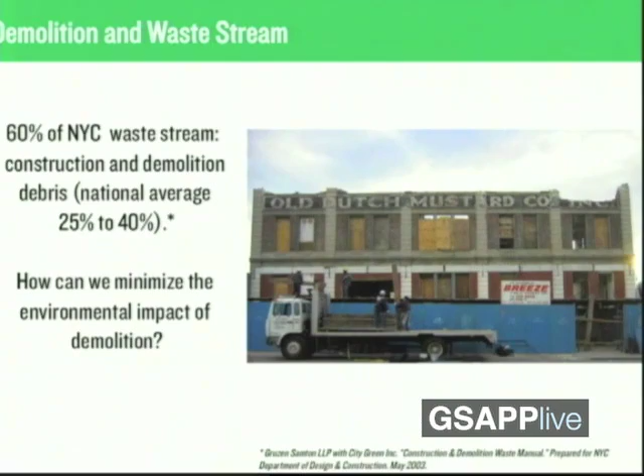Windows are always an important issue to preservationists. We need to develop metrics about retaining buildings versus new ones, and demolition. We're not going to talk a lot about demolition today, but this is something MAS is going to be working on. 60% of New York City's waste stream is construction and demolition debris, and we need to figure out ways to reduce that environmental impact, especially because we don't have a landfill in New York. We truck, and sometimes barge, all of our waste to distant states, so there's an enormous environmental impact.

We look at how we can achieve higher population density while preserving our relatively low-density historic districts.

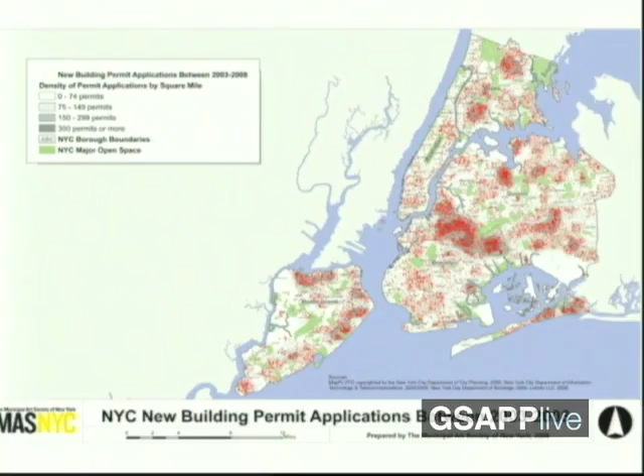Again, looking at change, we mapped new building permits during the boom, 2003 to 2008, and found there was about a 300 million square foot increase to the city during that time. So while there was a lot of demolition, the good news is that we actually did increase density, which is good—it's a greener city to have higher density.

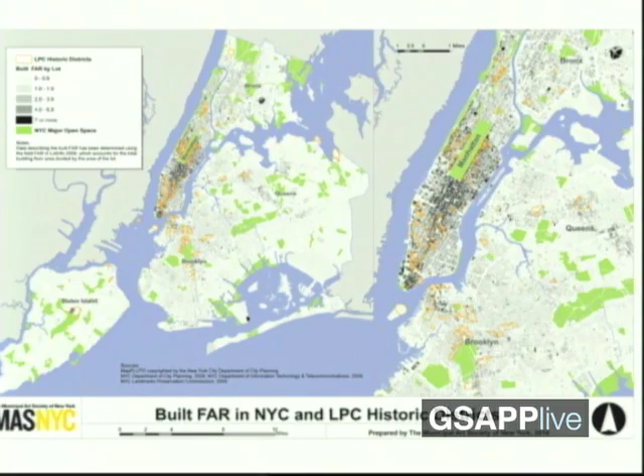Another issue preservation is going to have to start making arguments about is density in the city. In terms of built density, the floor area ratio, the darker colors are denser, bigger buildings, and the lighter colors are lower. But if you look at population density, it doesn't always correlate with bigger buildings having more population—Brooklyn has a relatively low building stock but high population density. So MAS is going to continue to do analysis on these kinds of density issues.

So the next steps: MAS is going to be writing a white paper, carefully listening today during the conference to help inform it, also drawing from the roundtables on these issues. We're also very proud that we just received a grant from the J.M. Kaplan Fund to do an actual demonstration project on a small landmark building. We're going to try to find a nonprofit owner of a building less than 50,000 square feet, and we're going to do the retrofit and share all the findings so we can start to build the case studies. With that, I'll conclude, and I'll ask Frank Sanchez to come up to introduce our keynote speaker.

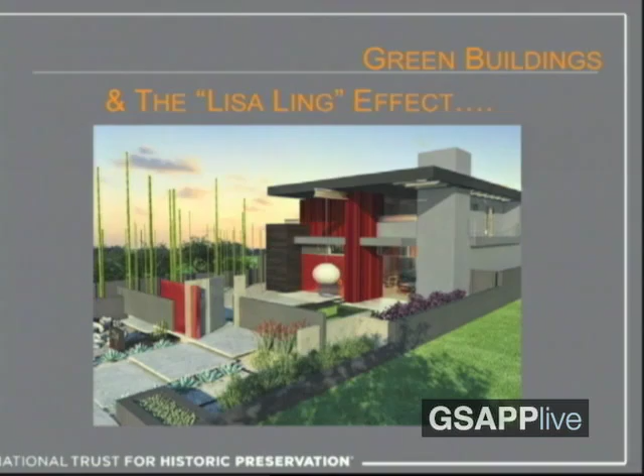And Lisa Ling isn't alone. I'm just going to throw these statistics up. In New York, Lisa showed you that 77% of buildings are responsible, the operation of buildings are responsible for greenhouse gas emissions. Nationally, it's about 40%.

But people tend to think about how do we solve the greenhouse gas problem through improving the operation of buildings, by building new buildings that are green and energy efficient.

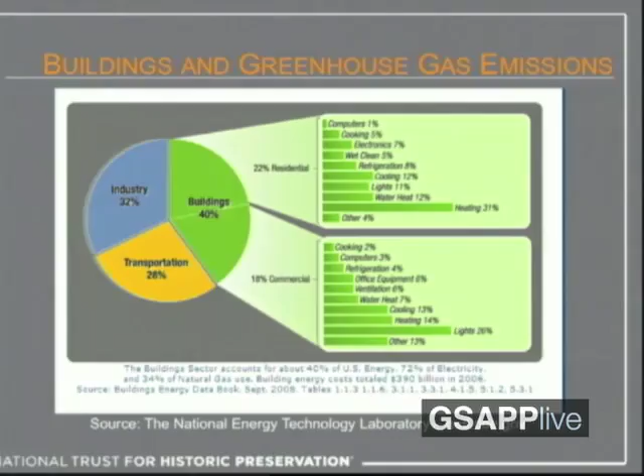Another statistic that I thought was interesting: the Environmental Protection Agency recently released a study that looks at GHGs in a very different way, not just by sector - industry, transportation, commercial - but instead looks at the greenhouse gas emissions associated with the manufacturing of material goods in the United States. It shows that 42% of greenhouse gas emissions come from the production of things, of stuff that we use and buy.

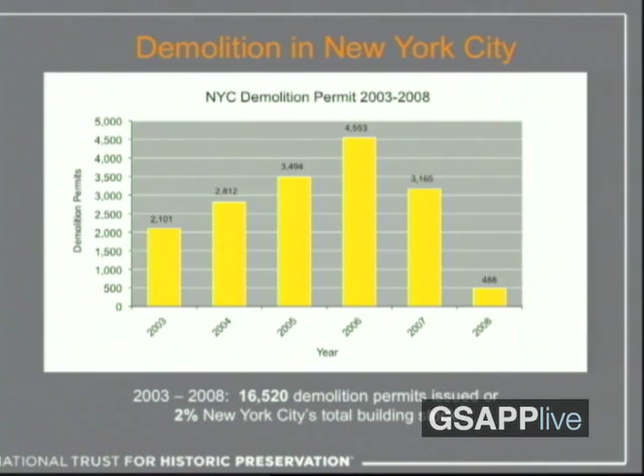Lisa showed you this statistic. I think it's interesting that building demolition trends are up. In the last couple of years they've been down because of the economic recession, but this is going to end at some point in time, and we're going to be right back.

So what has the National Trust done about this? Our sustainability program is focused on encouraging four things to happen, and I'm going to give you a little bit about each one of them. First of all, reuse or recycle entire buildings.

Deconstruction is great, but we don't think it's part of the solution, or not entirely. And I just gave you the reasons why - it's basically because when you recycle or reuse a building, you avoid the environmental impact of new construction that I just talked about. We encourage reinvestment in older communities.

These communities are as sustainable as it gets. They embody all the new smart growth and new urbanist principles. What we're seeing around the country - this is a community somewhere in either Kentucky or Missouri, I'm not sure which. I did a little road trip about a year ago, and this typifies dozens and dozens of communities that we saw in that part of the world, and there are thousands of them in the United States.

All the investment has gone two miles down the road to the interstate interchange. It's sucked the life out of this town. This is a Saturday morning, and this town is virtually a ghost town. What do we need to do to bring reinvestment back into these communities? The preservation community is not out ahead of this issue. We have some tools, but I don't think the tools are good enough.

Lisa talked about retrofitting green. We know not all old buildings are energy efficient, so we need to improve the efficiency of these buildings.

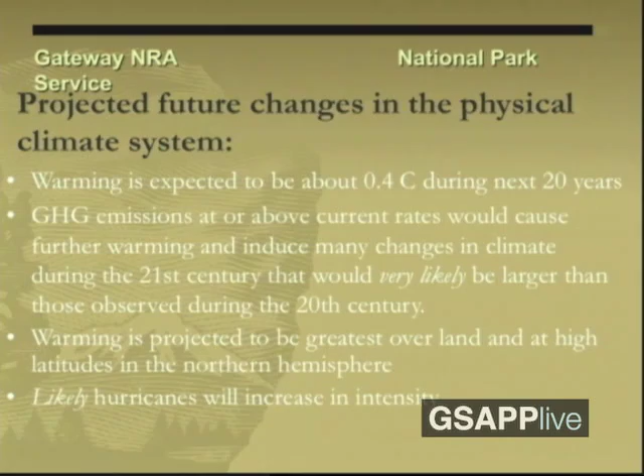Greenhouse gas emissions at the current rate would cause further warming and induce changes in climate during the 21st century, and this is very likely based on the IPCC data. Of course, the warming is projected to be greatest over land at the higher latitudes where we are, and higher up into Canada. We've all heard about precipitation changes, and storms and hurricanes are predicted as likely. So, again, as Dr. Horton alluded to, the weather data is not as predictable.

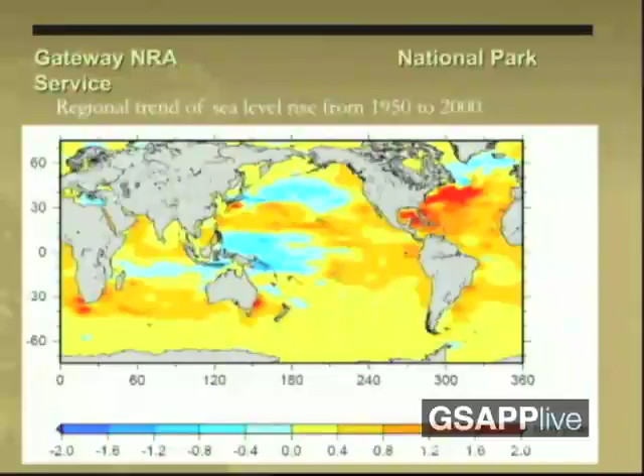And then the coastal parks - not just national parks, but since I'm working for the Park Service, I have to be concerned with the coastline of Gateway National Recreation Area and its cultural and natural resources. Even though I'm the natural resource guy for the park, I work very closely with our cultural resource staff in trying to develop ways to adapt.

Of course, we're already experiencing some of these hazards when storms, the nor'easters, come up - they seem to be getting higher and higher above mean sea level. The coastal exposure to risks is becoming compounded by other climate change factors, like displacement of habitat and increased invasive species - species that used to be restricted to the southern states below a certain latitude. Now we're finding them up here in New York City.

And then, of course, we're very concerned about our lowest lying areas, especially the salt marshes and other coastal wetland ecosystems, and especially in Jamaica Bay. Here's a map of the salt marshes in Jamaica Bay. It's not a good one to see the infrastructure around it, but you can imagine Brooklyn and Queens surrounding it to the north. There's no natural buffer system for these coastal areas to expand within the estuary.

The red and the green together represent the 1951 salt marshes, and the green is what is currently left today—actually a little bit less, because that's 2003. The rate that New York State DEC and the National Park Service have come up with is roughly about 30 to 35 acres of wetland loss per year, which is pretty dramatic.

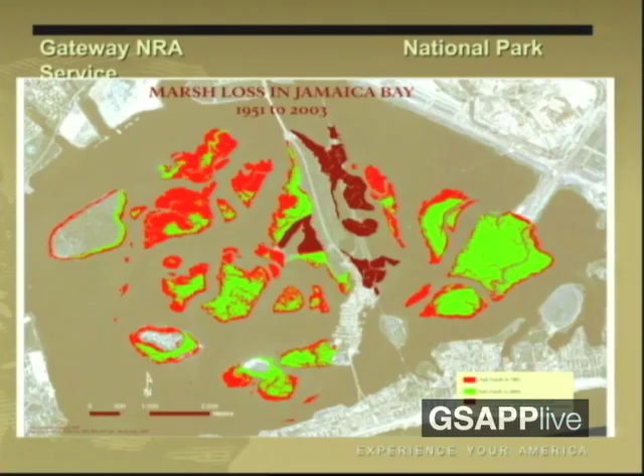We have restored that uppermost marsh area, shown as the thin green areas. Those are now pretty much filled back out again to almost their original extent, back to 1951, because of the Corps of Engineers' beneficial use of dredge material projects. They partner with us, and we're close to 100 acres of restored salt marshes now. But that's not really keeping pace with the loss.

These are just some things I'm sure you've all heard of as indicators of climate change in the Northeast—not just lilacs blooming earlier, but other plant species as well, quite a few more than just the lilacs. And also, we're losing our Adirondack spruce fir forest up north.

At the state wildlife climate change meeting in Albany, the prediction was that by 2025, which was not far away, all the spruce fir in the Adirondacks would shift up into Canada, with none left in the Adirondacks. That would pretty much take the spruce warbler out of the United States, and that's just one species.

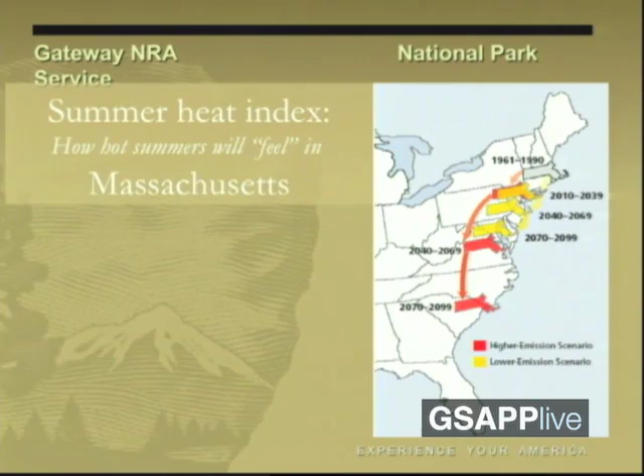This, apologies for repeating some of Dr. Horton's information, just presented in a different way: the days over 100 degrees Fahrenheit for Boston, Massachusetts. It's pretty dramatic, from 1 up until 1990, up to 24 somewhere within the range of 2070 to 2099. Illustrated with the state of Massachusetts, what it would feel like is as if the state was in South Carolina.

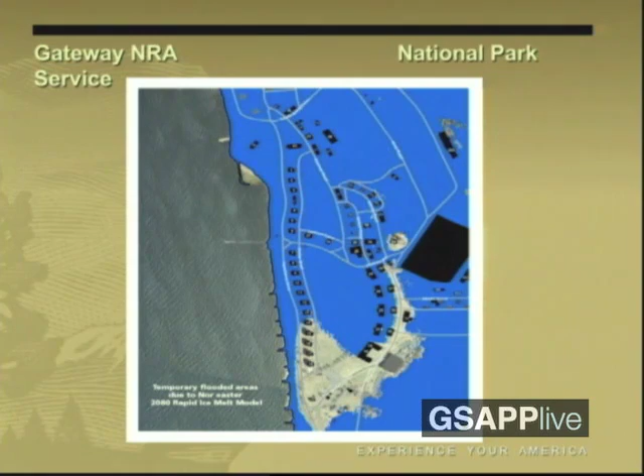The same area with the 2020 rapid ice melt model that Dr. Horton also showed data for. The blue would be the water. Then the 2050 rapid ice melt model due to nor'easter—so even more coverage, more doom and gloom for Sandy Hook. Proceeding with the 2080 data, you only have about 5 or 6 buildings there that are not at least flooded with about one foot of water.

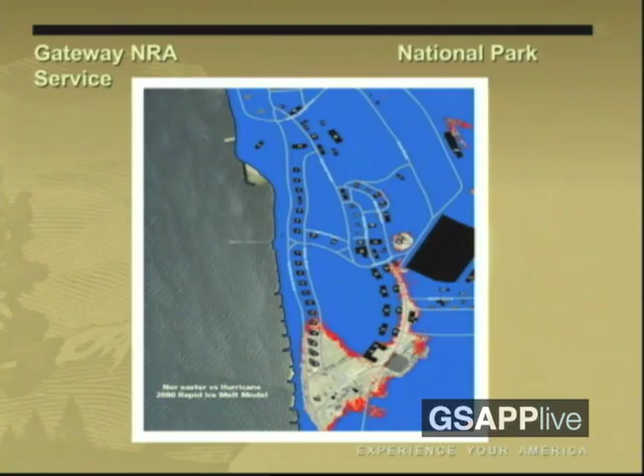This is with the hurricane data. The red would be it coming in, encroaching even further. And this would be the 2080 plus the nor'easter 2080 model with the rapid ice melt, and the red being the deepest water.

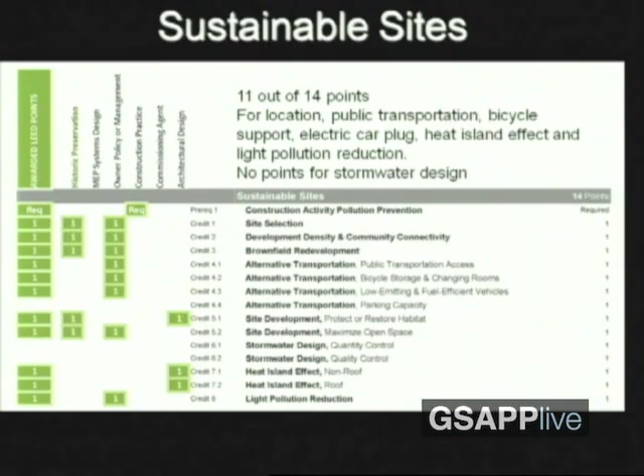Now, water efficiency is a very, very sore point for me, because water is hands down a completely underestimated, urgent issue everywhere. It doesn't matter how much rain you get, it doesn't matter what part of the world you're in - water is a very key issue, and we are not taking it seriously enough.

Now, water ties very directly to energy use. We actually use about 40% of the fresh water in this country to cool our energy plants, and nuclear plants actually use more water than coal-fired plants. So there are trade-offs back and forth.

But when we think about water in buildings, we often just think about the amount that we use to wash our hands or for toilets. But actually, a very substantial part of water in buildings often goes to cooling towers, and they have traditionally always used potable water.

That's an important issue. Another 10% of water usage in this country for fresh water is attributed to leaks in our infrastructure - 10 to 20% is what you sometimes read. Sometimes Australia says it's as high as 25% in their system. But the infrastructure for water is one of the largest investments in this country - I believe it's approximately $82 billion.

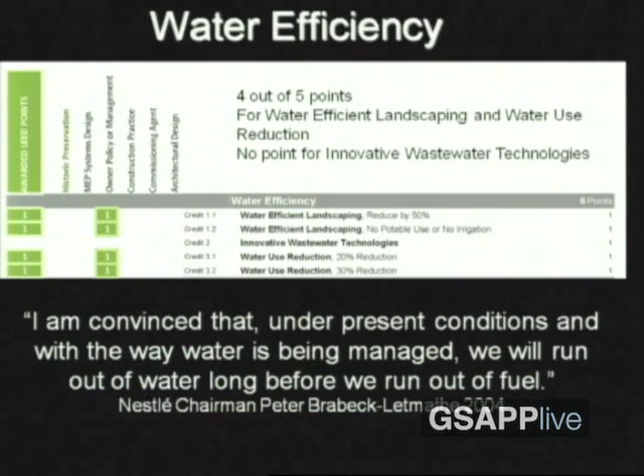And so New York has been at the forefront of looking upstream in their water supply and thinking in a watershed management way. So when you only get 5 points in a system where water is going to be the next international issue, I do take exception to that, and do think that we really have to rethink what we're talking about.

Now, we did get water efficiency. We did actually put a green roof into the building in this area that is a current light well. It is a great amenity.

It is hands down our most visible and celebrated green feature in this building. Trade-off: all of that cooling and mechanical equipment went up to the 16th, 18th, and 20th floors. That means you have to pump things farther, and our electrical loads went up because everything that goes up and down that building has to travel farther. So we do have this wonderful amenity. It does help the heat island effect, it captures stormwater, it has a cistern, and it is much loved by all the tenants. But there are always trade-offs.

One of the things about green roofs that we're all learning is that they also help natural habitat. I've actually gotten emails from people I know with buildings across the way who've told us how much they love the green roof. They've also mentioned the people who sunbathe on the roof, but I will not comment on that.

Energy and atmosphere, of course, is the issue that is so key, but this is also, I believe, a red herring. Energy use intensity is a very false metric. We all know building size is growing. Studies out of England show that courts built in the last 5 years have the lowest energy use intensity, but they're 40% larger than historic courts with the same level of functionality—they're just bigger. Energy use intensity is a very false metric for whether we're making smart decisions when we use more materials to do what we need to do.

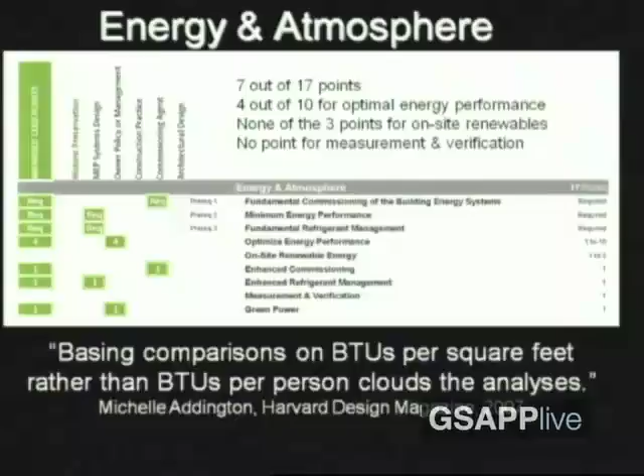We do believe you can reduce energy use in a building by just being smart and capturing maintenance and operations opportunities. That's key. You don't just green a building and walk away. Maintenance and operations is hands down as important, if not more important, than what we do when we design buildings.

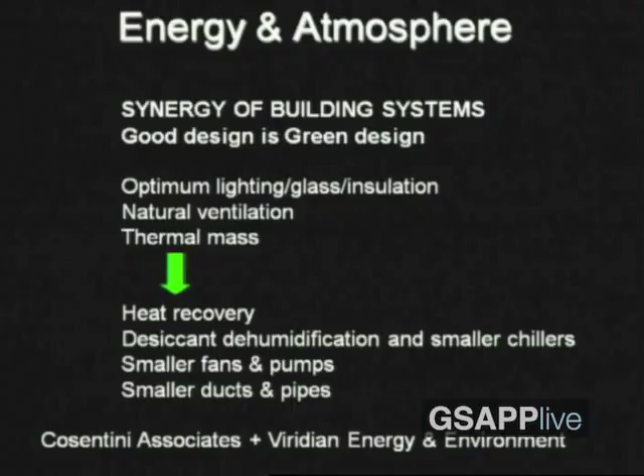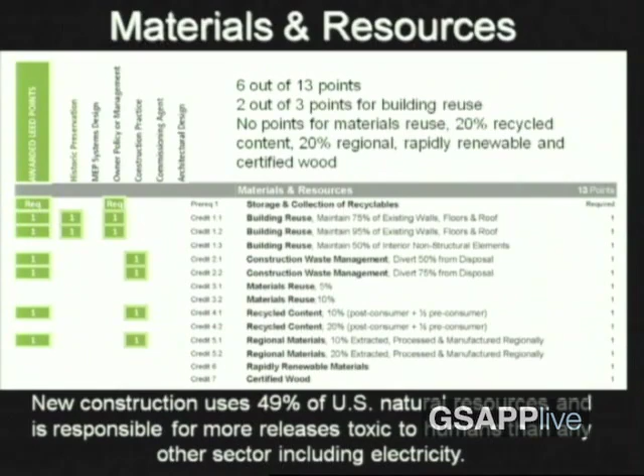Materials and resources—another sore point as far as whether we're being realistic in trying to green the world. I'm not an expert in LEED, Green Globes, or BREEAM, but I've been told BREEAM, the British system, does a better job of capturing the point that every material has an extraordinary upstream and downstream impact of waste and toxicity behind it. So the more we can reduce the use of materials, the better. That's not a very popular thing to say.

I think the last time I spoke about something I call nega-building, the idea that we use the resources we have, was at the AIA conference. Oddly enough, that didn't go over really well.

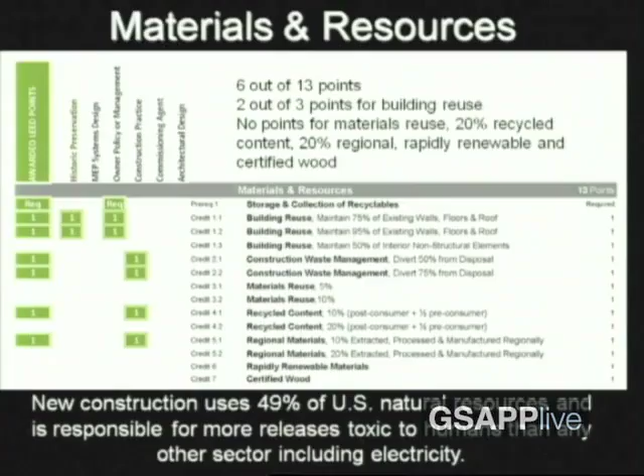So anyway, we can reuse buildings—it is important to reuse them. There are studies coming out showing that when people are in spaces they love, historic spaces in particular that are richer in detail, they're more willing to accept variances in personal comfort. That gives us more leeway in whether a building is considered comfortable and whether the mechanical system has a bit more flux. These kinds of things, perceptual comfort, is something we're not very good at thinking about, but it's an important part of sustainability that we don't necessarily capture.

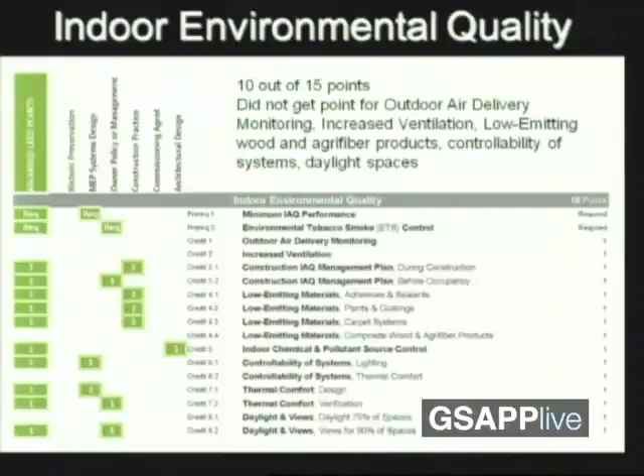Indoor environmental quality, of course, once again ties to toxicity. This is an area where we could have captured more points, and I do applaud the LEED system—had we had better documentation and been able to engage more of the subcontractors, we would have achieved more points here. This is an area where LEED really does make a difference in your construction team.

We did capture, of course, views, daylighting and views—something we'll hear more about in one of the other case stories. There's a big question about whether it really makes sense to gut all our buildings. Do we really want to rip everything out of the insides in the name of flexibility? And if so, do we want to leave things more exposed so it's easier to change? If a building has a multi-hundred-year life cycle, shouldn't we leave systems more exposed so they can be switched out in 20 to 30-year cycles? This is something Stewart Brand brought up in How Buildings Learn.

Innovation and design—we got points for this; you can plan ahead. What we didn't get points for was something I loved about the project: the GSA really encouraged us to go after research money, and we rewrote the grant applications and pursued them. We got grant money to study off-the-wall things like fuel cells, which are no longer quite as off-the-wall, and steam back pressure turbines. Some of the studies showed that things we thought we could do as a team really didn't make sense at that moment in time.

One of the things I was most intrigued by in our brainstorming was the idea that titanium dioxide, most often used on the outside of buildings to clean because it absorbs pollutants and turns them into water that runs off, could be put on the inside of glass and interact with fluorescent lights to create better indoor air quality. That turned out to be true, but the life cycle analysis of how titanium dioxide is mined made it a non-starter. That was an interesting study for me, always looking at the scientific evidence of what we're trying to do, whether it was the right thing to do or not.

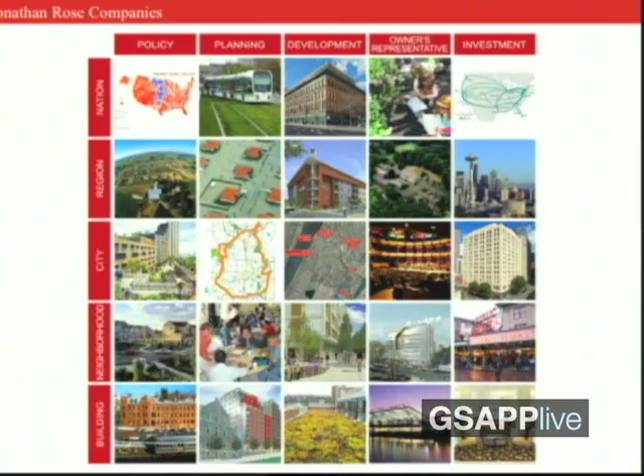We also do ground-up development of new green projects, typically mixed income and affordable, and we're doing investment in existing buildings. Each of our practice areas brings us closer together, and I think makes us better able to see the entire picture that Jean referenced.

This is just to give you a sense of the range of our expertise. This is a building we just finished for Cooper Union, which is LEED Platinum, designed by Thom Mayne from Morphosis—a new academic building, new lab. And this is a project we're doing in the Bronx, which we won through an international design competition to promulgate a new model for green affordable housing here in New York City. This is called Via Verde.

For us, the other critical piece is that, building on the issues coming up in earlier presentations about wetlands and the encroachment of water and where to build or not to build, we have a firm belief that building on existing nodes of mass transit is critical, because green buildings in the middle of nowhere that require a lot of commuting don't really get you the net environmental benefits you need.

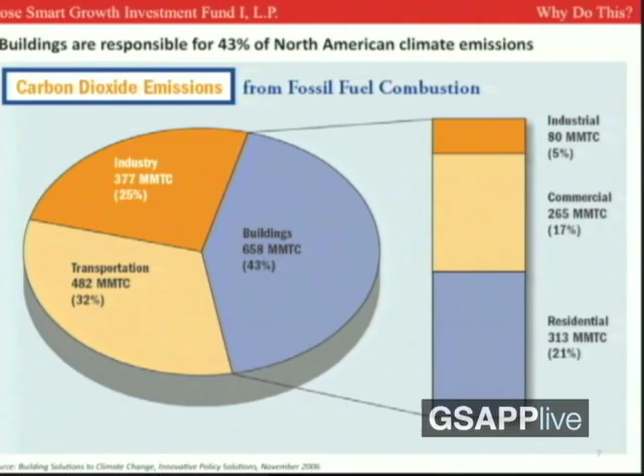I have two case studies: one is a commercial office building in downtown Seattle, as was mentioned, and the other is a 100% affordable project that's closer to home. Since you've already seen an office project, and we'll see another, I'll go through this one more quickly. This is a project right in the heart of Seattle.

We were attracted to it because we were driving returns for our investors, but also trying to create a great green product. We were looking at this project back in 2005, early days for a light rail project that has since been built in Seattle, running right under downtown next to bus lines. This building is a block off what was, at the time in 2006, a future light rail stop, making it a great transit location. It was also a couple of blocks from some of the best retail and real estate areas in Seattle.

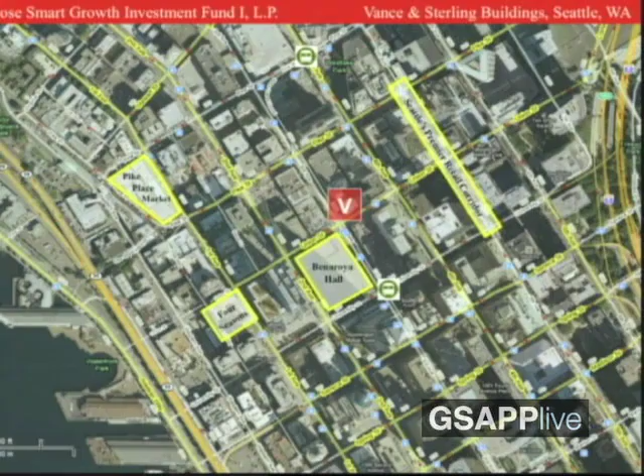Between Pike Place and Fifth Avenue there was a lot of development and exciting things happening. This building also happens to be across the street from Benaroya Hall, which I think is arguably Seattle's version of Carnegie Hall. Walking into the building, though, the initial impressions were sort of like this.

Obviously this picture is terrible, but it gave a sense that this building was very tired and needed an upgrade. The tenant improvements were a mishmash, and things had been built up over time with no particular plan in place.

So we worked with an interdisciplinary team from the get-go. We had Turner Construction, Arup, and our building managing agent working with us, along with ZGF Architects from Seattle, who helped put all of this together.

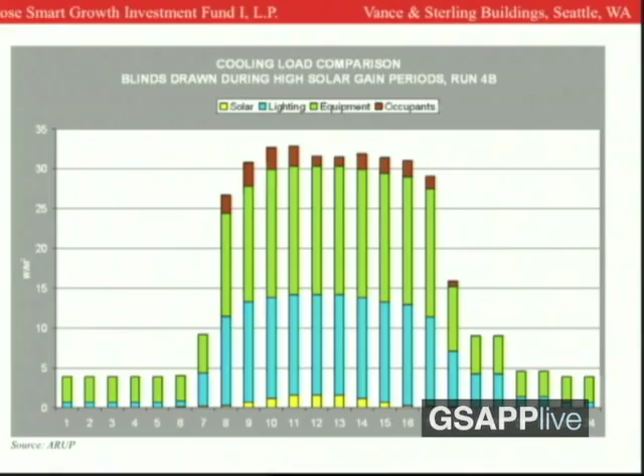One of the things we did was ground all our work in study and analysis, and this was our study for developing the facade shading and cooling strategy. This was just a sample from a run that Arup did on heat gain, but we developed a very simple strategy for the spaces.

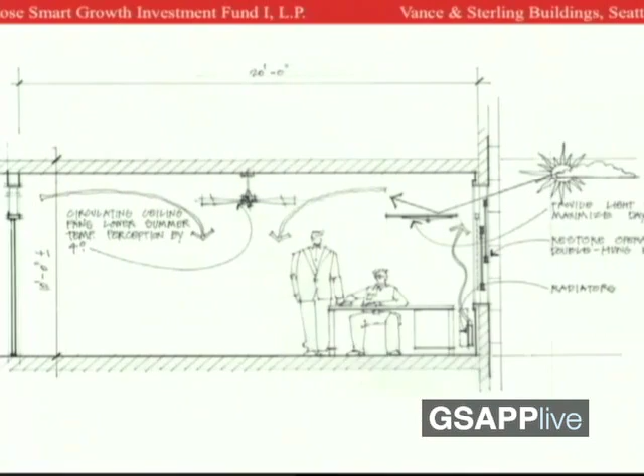We looked at ways we could leverage the existing elements that were there, at that intersection of preservation and greening of an existing building. This building had great ceiling heights and terrazzo floors that were often covered by old dingy carpets gathering dirt. It had operable windows in a 14-story high-rise, which was a great advantage, and a functioning steam system actually hooked up to district steam in Seattle, which was building an urban hardwood plant that would be carbon neutral.

So we used this simple concept to take the spaces you saw earlier and create office spaces like this, where many of the systems are more exposed. Throughout the building, our effort was to decommission air conditioning wherever possible and integrate ceiling fans, and teach tenants to use the double-hung windows, bringing the upper sashes down to get circulation of space. You can see in this photo also light shelves and the Mecho shades.

Right by their desk, you can also see the building had these amazing wind guards that helped bring breezes in, keeping the papers on your desk while creating great circular airflow in the spaces. So we transformed the tenant spaces, restored terracotta on the exterior of the building, and took corridors that had drop ceilings and felt a little claustrophobic and antiseptic, trying to integrate some of the green features into the building.

In this picture, you can see that we ran future conduit down the hallways to address the needs of tenants for low voltage and otherwise, but also had to, in complying with LEED, come up with creative ways to enhance ventilation. You can see a unit where we core drilled through the exterior wall of the building to bring about 300 CFM of additional airflow that's on a carbon dioxide meter, to turn on and off just to enhance ventilation.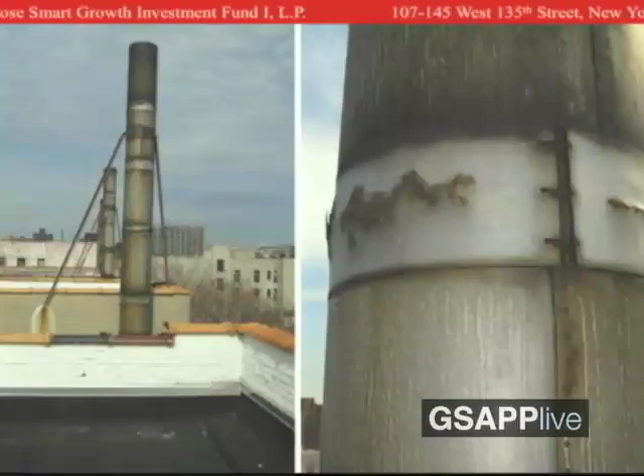Going through this, you can see a mix of conditions we found: the parapet was degraded, a sort of bunker-like mentality with the management office, boilers—this is 10 contiguous buildings with 10 different boiler plant systems each, some running as low as 55% efficiency, old deteriorated stacks, and interior corridors that basically left you not wanting to live there.

It's our firm belief as affordable housing developers and mixed income developers that affordable housing doesn't need to be this way, and that it doesn't need to make people not want to live there.

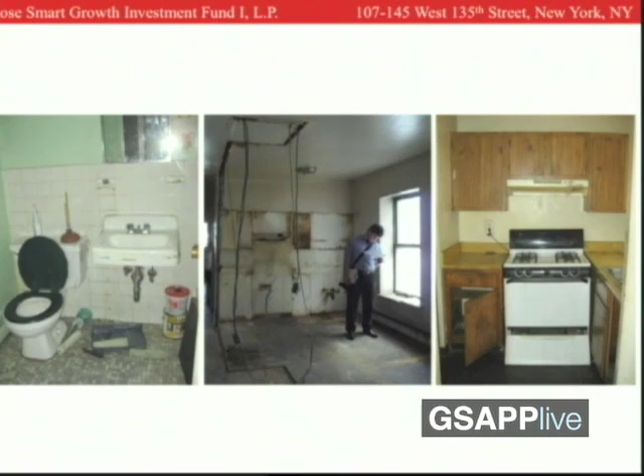We found, again, a mix of conditions in the units, and all of this was part of a beta project for HUD's Green Retrofit program. We talked to HUD locally and to the city, but also wrote to HUD in DC as they were launching this Green Retrofit program.

We were the first to receive money out of the stimulus bill, and the money from that program, the Green Retrofit, effectively doubled our capital budget—what we could do.

So we did an intensive study, unit by unit, of all the conditions to figure out what our plan would be. We actually found a couple of units where, because of the need to just lease them up and get families in, we were able to just restore them to a workable condition.

I'll skip through some of this, but what we did is develop an archetype for what the units will be like. This project is 97, 98% leased right now, so we're working around families to do this retrofit.

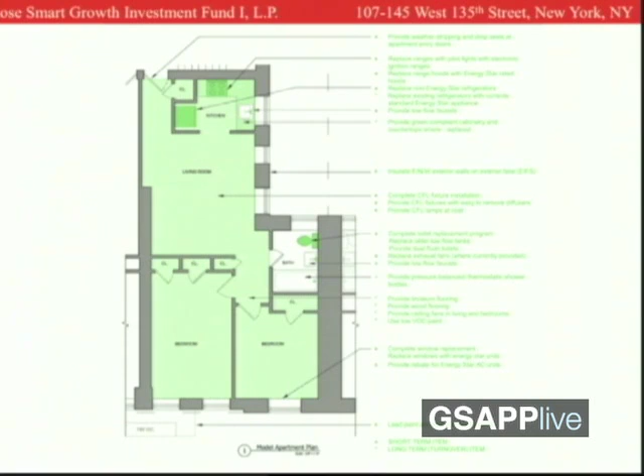But we've developed for the vacant units a specification to achieve a sort of height of green, so to speak, which we'll attain as units turn over. There is some stuff going on around tenants in terms of lighting, water retrofits, and otherwise, but this will be the full effect when tenants move out of a unit.

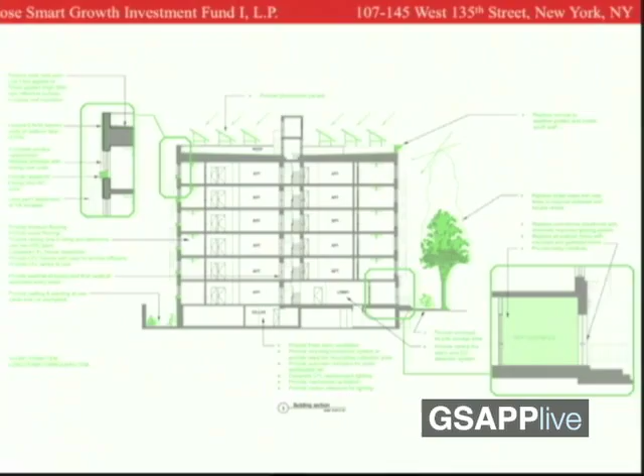Some of the green features—again, hard for you to see—but the point of showing you this is that we're thinking about the building as a system. You need to think about this as an organism that functions, where inputs on one side have a ramification on others.

One of the things we're doing too is integrating solar PVs to help offset the base building load. PVs in retrofits are tough to make pay, but since we were able to get some subsidized loan monies in to do this, we did a 29 kilowatt array that will generate about 10% of the base building load.

I'll wrap up by saying the other thing we're doing with this project to push it forward on the operating side: we quickly did integrated pest management, green cleaning, and training of our managing agent, and we're also a beta site for Bright Power.

A firm developed this thing called energy scorecards. It's a really fascinating tool. They have the largest database in the country of affordable housing, which acts a little bit like Energy Star in that it's a benchmark tool to benchmark your building's performance against its competitive set.

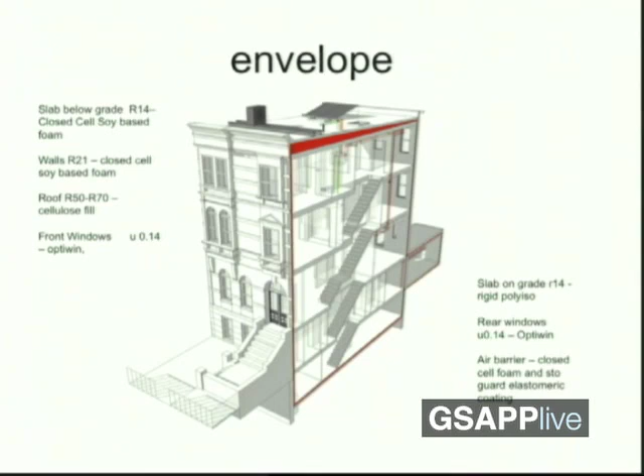So we use this closed cell spray foam to be our air barrier and our thermal barrier. In the roof, we use cellulose fill where we could, rather than filling it with the closed cell spray foam, because the cellulose has a much lower embodied energy. So everywhere we could, we tried to minimize the amount of closed cell spray foam because of its high embodied energy. The windows were a big factor that I'll go into in a little bit more, but we used windows from Germany, from a company called Optiwin.

As most of you know, all around the city we have a high water table, and so the basements are constantly leaking water. Even if you take care of the slab issue and you don't have water coming from the slab, the side walls are always kind of crumbling apart and falling in, and a lot of people don't realize that's just the moisture coming in and breaking apart that mortar.

So one of the things we were concerned about is, if you get a building airtight, extremely airtight, then moisture is a super large concern for you. You have to make sure that you're not going to get that water in the building and keep it trapped in the building. So the detail, let's see if I can point this here.

So that's something that we've been doing on all of our projects in the last couple of years, not just the passive house projects.

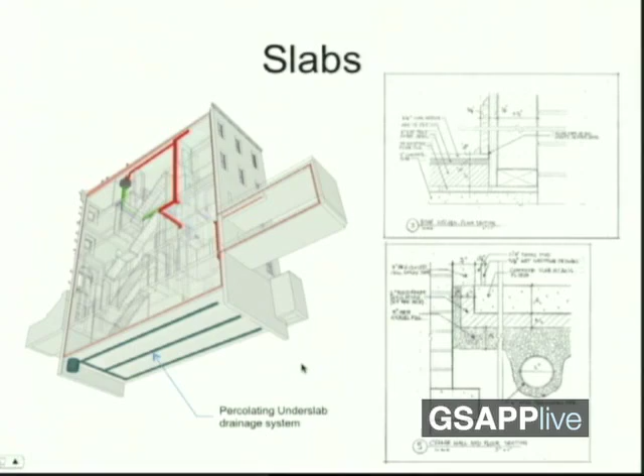So in our walls, Passive House actually requires, in order to be certified, that you do thermal bridge analysis for any moments that have building connections where you're not going to have continuous insulation or a continuous thermal boundary. So at each of these areas, this is the front wall or back wall condition where the joists basically butt right up against the brick on the interior of the building. We did our best to use non-standard framing techniques to pull the studs away from the wall and get the spray foam to be continuous behind it, and also around the joist areas to pull the nailers farther away so we get more direct connection of the spray foam.

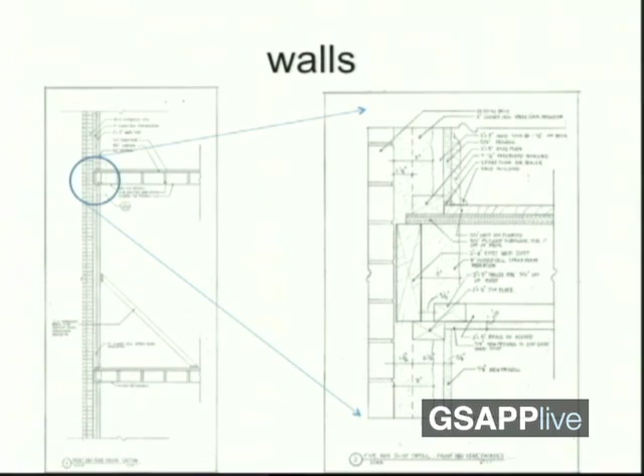For the building, this was a landmark district, and so when we went to the Landmarks Commission, we had to show them that we were actually going to maintain this look of a double hung. Passive House standard for airtightness is to the degree that you can't find a double hung window anywhere in the world that would have gaskets airtight enough for the standard.

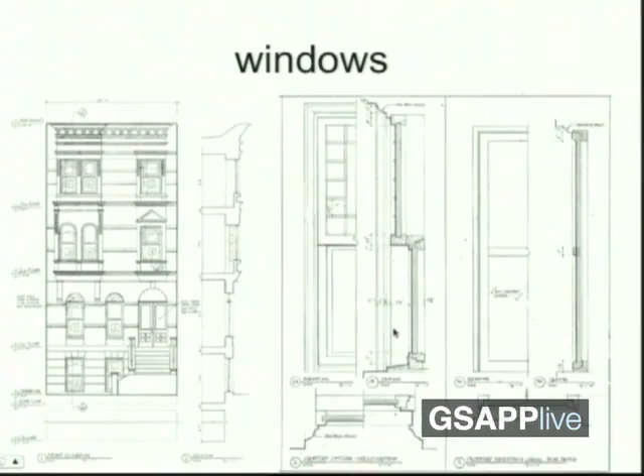So we developed a window that basically has a fixed upper sash, and then we did an interior tilt and turn lower sash. That way on the exterior of the building, we were able to achieve this shadow line that simulates that double hung look while at the same time meeting our Passive House standard.

This is on the interior, so this is not an original window to the house. This was a relatively cheap window retrofit on the top floor that they'd done probably about 20 years ago. The new Optiwin windows were being installed, and you can see the tilt and turn on that lower sash coming in. The moldings around the window here we had all restored. Actually, these didn't exist - we had these made to match the ones existing and covered in paint on the lower floor. The carpenter did a wonderful job hand carving the leaf features.

We had some original stained glass to the building. These are all triple pane, super insulated windows - this is a tilt and turn casement window that opens to the inside. For this window, we had a local maker reglaze and re-lead the stained glass, then sent it off to Germany. Unfortunately it's kind of high embodied cost, I know, but they installed it as the middle pane in this triple pane window, with the energy efficient argon gas filled in. So now this window is protected by two of the panes, and we think it's going to have a very long life as a result.

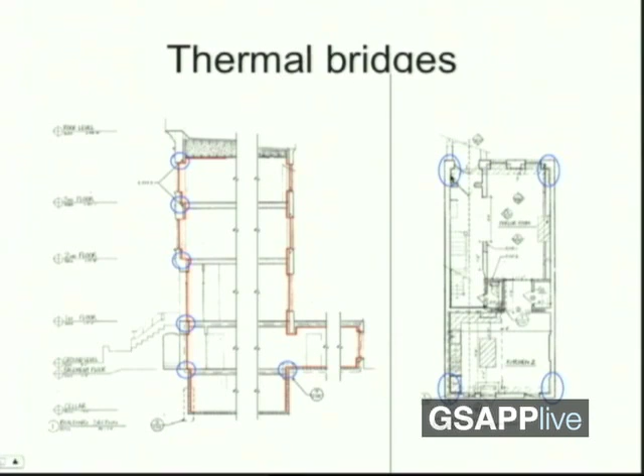One of the big things too, if you look in the plan view, where you have the corners where the party wall connection is - this is an attached townhouse on both sides here and on the back. So what happens is if you just insulate along this face, you're going to get a thermal bypass through the brick to the outside right in those corners. So we had to try and come up with a way to address that.

So we created therm models. We also did WUFI models for the vapor and moisture questions. These therm models are very informative - they show you, this is our building, this is the neighbor's building where we can't affect anything, and this is our party wall, this is the exterior. So we were basically saying, okay, how far do we need to bring this insulation around in order to make it so that we don't have a significant thermal bridge through the brick?

These are just areas in the air barrier that we were concerned about early in the project. This lower floor was not a full gut, so we were going to have to find out if we needed to open up those areas separately.

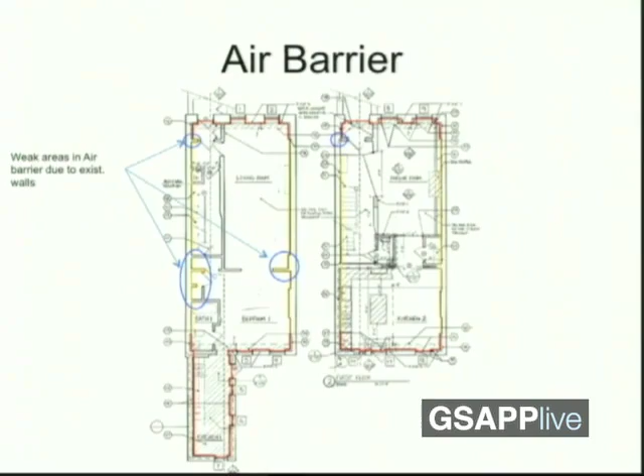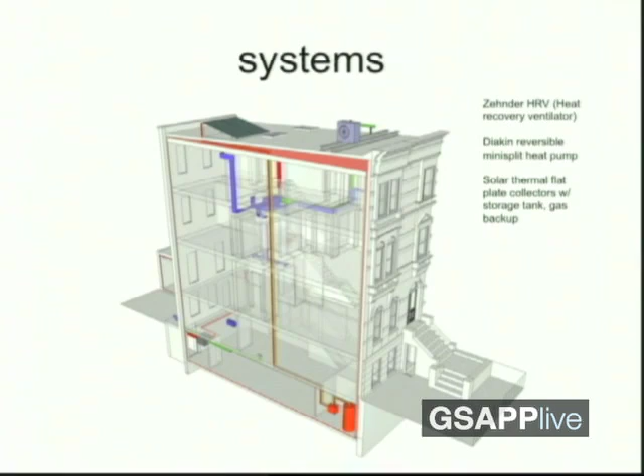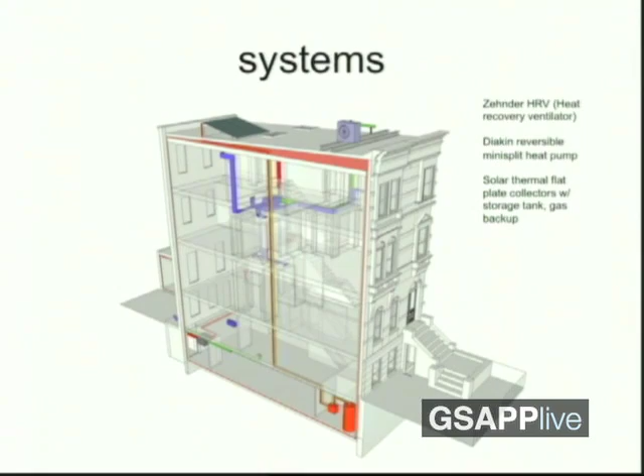So the systems for the house: when you get the building that airtight, you have to have mechanical ventilation. We have a Zehnder heat recovery ventilator installed in the project. We also have the Daikin mini split system for peak load heating and cooling. And then we had a solar thermal collector on the roof for our hot water.

This is showing the solar thermal tank. This is basically the solar thermal collection, this is a 120-gallon storage tank, and this is the Zehnder heat recovery unit with its filters.

One of the great things about this is once you get these brownstones or passive houses this tight, you can really control where the air is coming from. You're not dragging air in a passive way through walls that have 120-year-old dust in them. You're actually bringing the air in directly where you want it and depositing it there, and it's going through filters that you can change on a regular basis.

This is the solar thermal plates on the roof. These are two 4 by 10 foot collectors, and this is expected to do about 70% of the winter load and 100% of the summer load.

Some of the challenges: public awareness when dealing with Passive House, going through the Landmarks Commission, trying to educate the people we were talking to on what we're doing and that we're not just blindly creating a project that's going to destroy this house. Obviously they couldn't see the after images where the windows have that nice double hung look, so they were very skeptical that we'd restore the house back to its 1880 look.

The air barrier is something that's extremely difficult. The nice thing about Passive House, talking to clients and prospective clients, is that it's easy to get excited and say, oh great, 90% less energy, let's do it, it's not going to cost that much extra, so let's definitely do it.

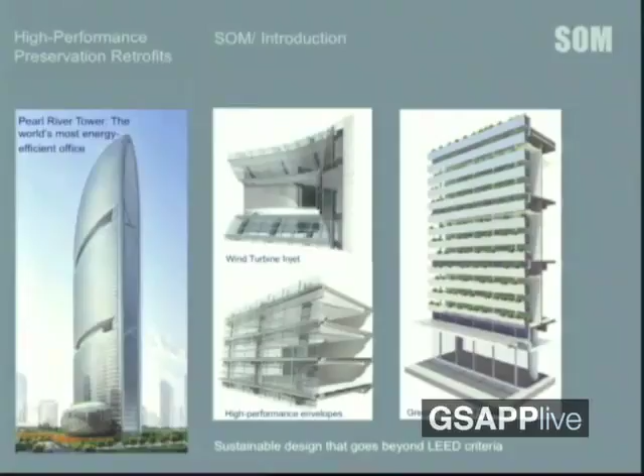For us, it's not only important to look at the past, but also to make sure we're looking at new technologies in the future, and how we can bring those back to buildings that we are renovating. It's also important, I believe, that we have a direct connection with the world of academics.

Within our own firm, we have a direct connection with Rensselaer Polytechnic, an effort we call CASE, located within our office. We have 20 students actually involved in research with us on new products, which has been very instrumental in our effort. This is a brief introduction of projects we've been involved in renovating 20th century buildings.

Perhaps the one most known to everyone here, located in New York, is the work we did at Lever House, working very closely with Landmarks on the installation of a whole new curtain wall, with lots of new energy improvements, all looking very closely at the historic details and dimensions of that curtain wall.

Then I do want to talk about the building Inland Steel. Inland Steel is a building that was built by our firm right after the war. It's the first major building built in downtown Chicago. I will also say there were a lot of things about this building that were very much about innovation.

The building itself had a separate service tower that separated the service functions from the glass office block, a column-free environment with columns on the outside. There was a double-glazed window system at this time, and an in-floor deck system.

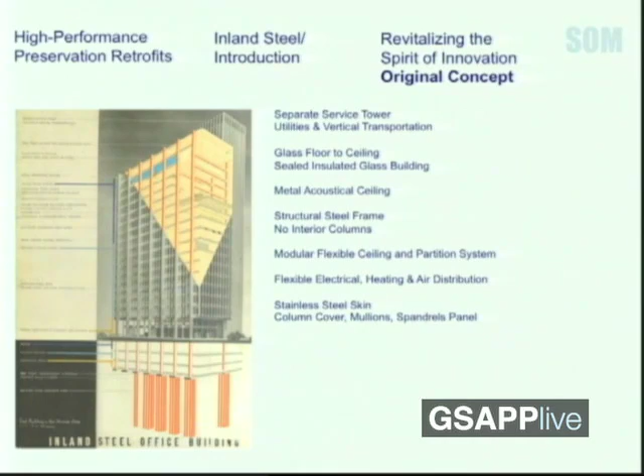What I will say as I start to talk about our work on this project today is that this building was bought by a client, Richard Cohen, with Capital Properties. He lives here in New York. He purchased this building at the recommendation of his best friend, Frank Gehry.

Frank talks very lovingly about being a young architect and admiring this building, looking at its stainless steel facade, appreciating the sort of new technologies and almost handmade quality from the exterior of the building, and he convinced his friend that this was a building worth saving.

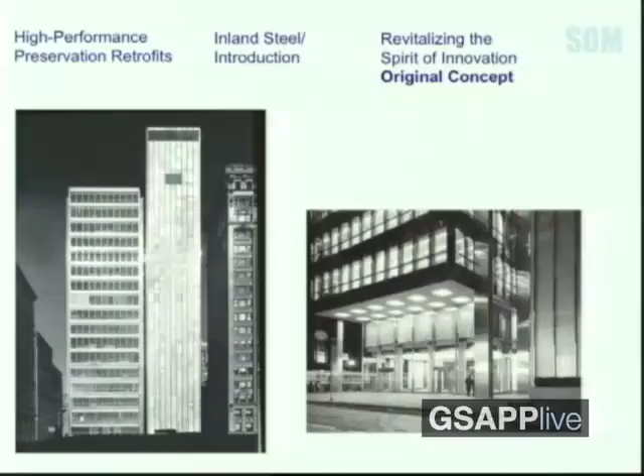These are some of the original photographs. This is actually SOM's office within this building in the 1960s.

Beginning this project, working with our clients, we had huge advocates of innovation. Our mission here was really to not only restore this building, but to see its historic mission of being a building about innovation, and how we could look at sustainability and performance of a building, and bring all of those attributes to this building in a real, living way.

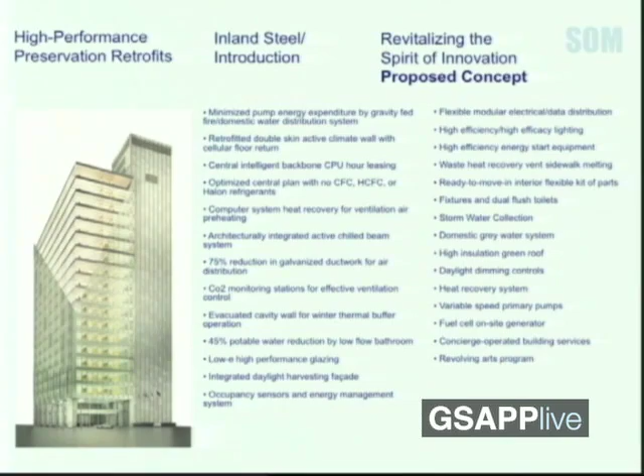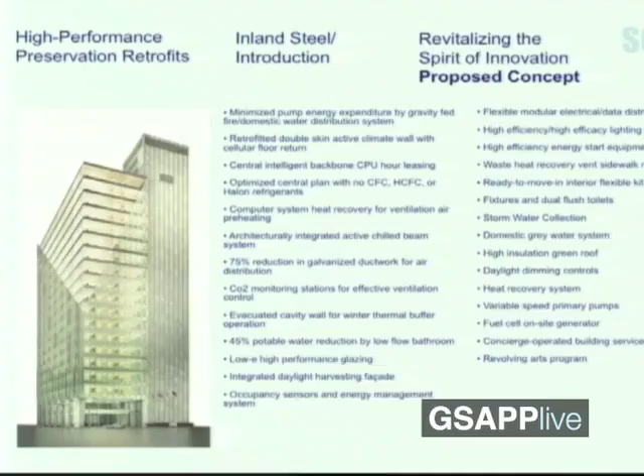So we went through the building and developed a master plan of many things that we could bring into play, a lot of them using the technologies and infrastructure that existed within the building, along with new things we were doing in buildings around the world that might find a place here, including chilled beam systems and new technologies in terms of air and water retention.

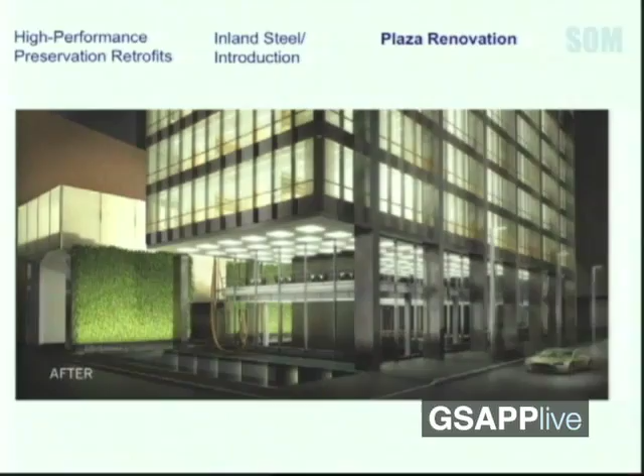Some of the things we looked at for the renovation were at the lower level of the plaza. We looked at the plaza itself in terms of how we could have reclaimed heating sources to melt the snow, how we could recapture that water, how we could layer in new planted walls, and we developed a strategy of green walls that could be located in the pocket park between the main block of the building and the smaller annex behind.

We also were working with manufacturers on new technology for street lighting, how we could bring in new technologies for LED, and really let this building be seen as a real player in terms of new ideas that could be displayed.

We also looked at more prosaic things in terms of how we could be thoughtful with water in terms of our washrooms and so forth, which were simply a part of this.

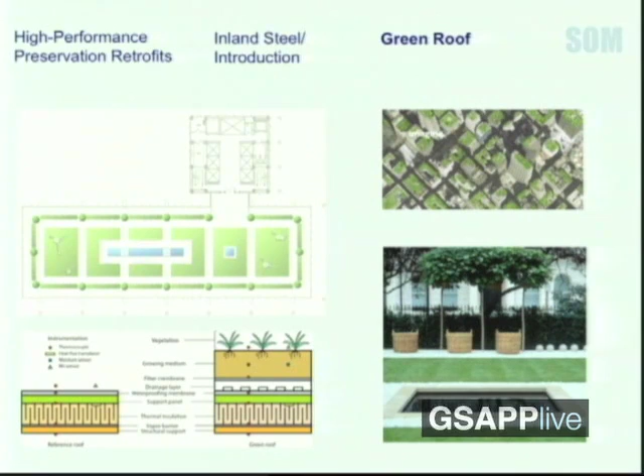Also, green roofs. We have a green roof at several levels of this building, at the annex and also at the top of the building, with all of the performative measures that have already been discussed by several of the panelists here. One of the other fascinating things of going back and visiting these buildings is that there was a lot of space that was dedicated to outmoded technology.

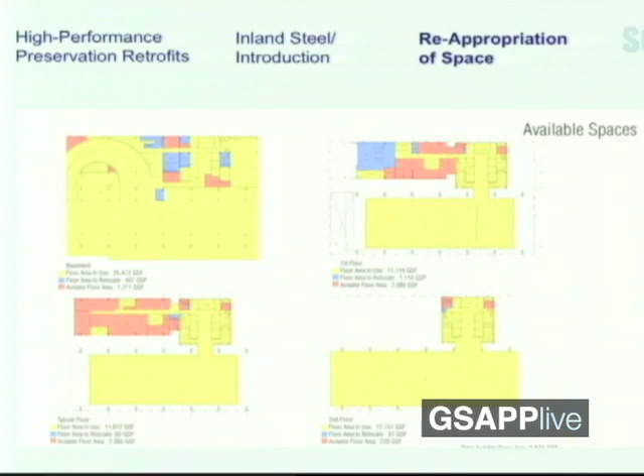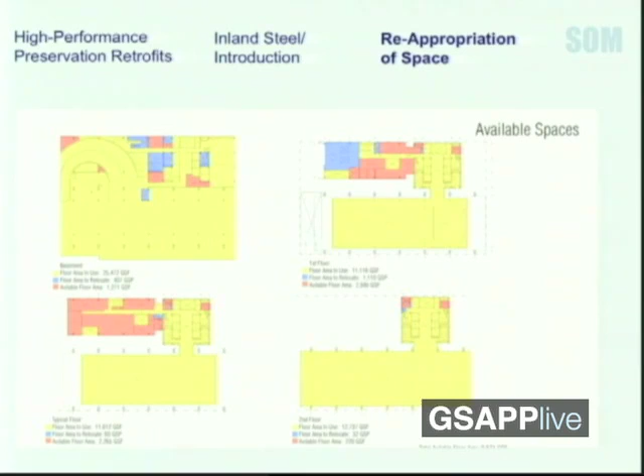Some of the sort of large overriding building systems in terms of central air facilities, we could reclaim. There were a lot of old technologies of big telephone rooms that had already been cleared for us. So I think in looking at mid-century buildings, there's a lot of area that we can find and add into the rentable and usable area of these buildings.

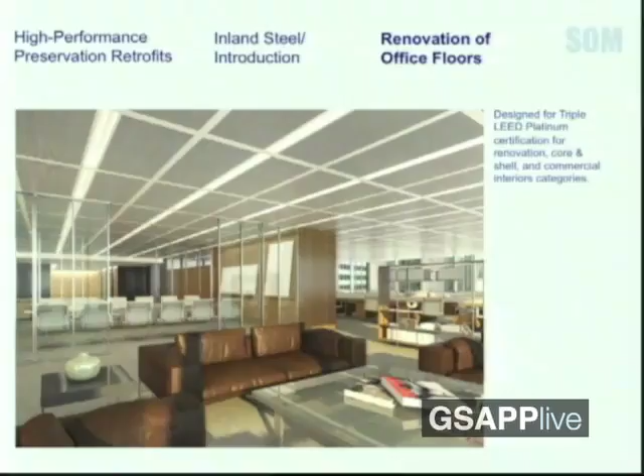And then the development not only of the building on the exterior, but also the interior with a high-performance integrated environment that included lighting, air conditioning, new modular office walls, and furniture.

Then I'd like to talk briefly about several of the issues we've been dealing with in terms of working on landmarks and renovating this building. One of the key ones is really dealing with the curtain wall.

There were a series of options that we looked at. One which was looking at the exterior wall and replacing its glazing. As I mentioned, it already had double glazing. How could we bring in new technology of triple glazing, replace all the seals?

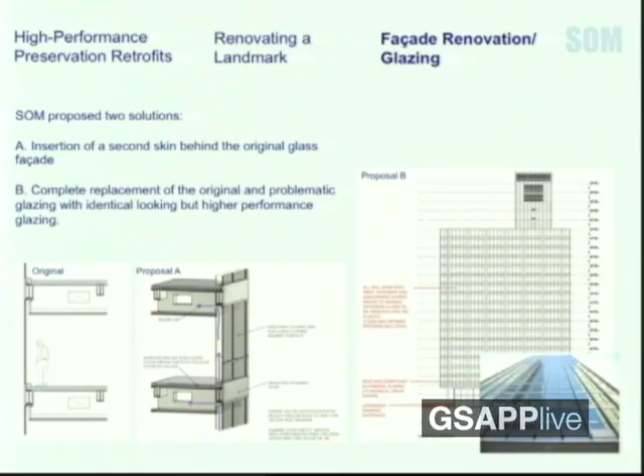Another one that we also looked at, and I think was particularly interesting, was leaving all of that existing fabric in place and installing a new second wall behind it, several inches behind, that would create almost the value of a thermos in terms of mediating the extreme temperature outside and inside, which we find particularly applicable in cities like Chicago. We have wild swings between the heat and the winter, and we included within that cavity a vertical louver system that was part of the original design of the building, all connected with sensors to the sun, looking at the different facades and how that might be implemented.

We also have dealt with a whole series of ADA issues. I think that while we all can see there's been lots of dialogue between designers and people interested in preservation and landmarks accommodating ADA requirements, I don't think any of us would think that buildings we're preserving should in any way not accommodate the highest degree of accessibility. I think in the near future we will also see that we cannot foresee a building being renovated that cannot also accommodate the highest degree of sustainability.

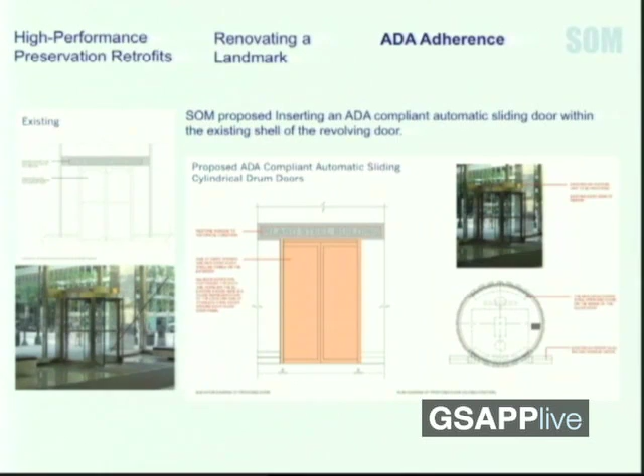So here are issues in terms of keeping the existing drum, how we can insert new sliding doors and technology that allow for accessibility.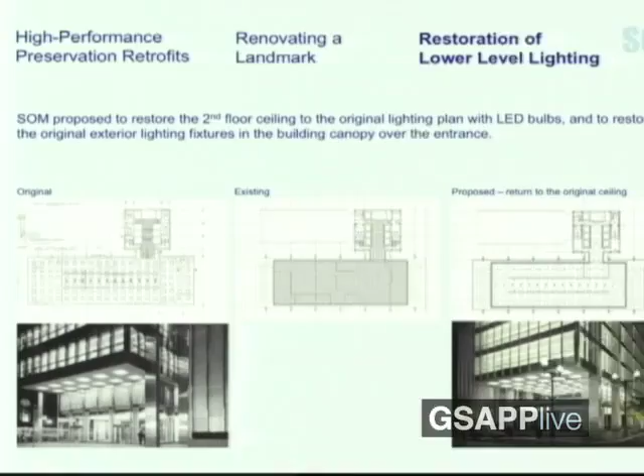We also did a lot of work in terms of lighting of the building at the lowest level. We were able to go back and reinstall these very large square luminous fixtures that had been taken out. We're looking now at the benefit of new technologies in terms of neon, LED, and higher energy efficient fluorescence.

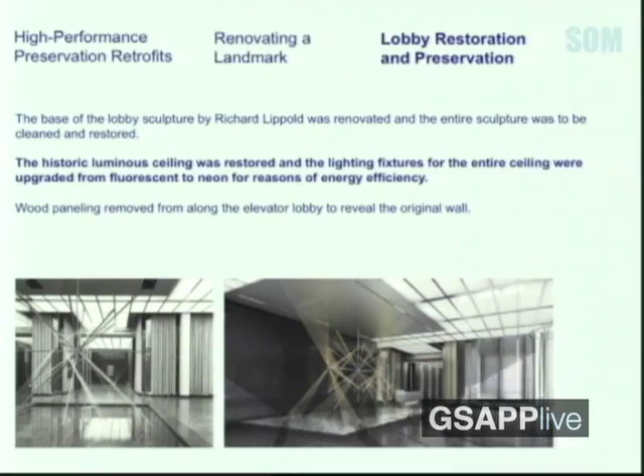So once again, we can have this kind of lighting in our buildings and it can in fact be sustainable. We also looked at this with luminous ceilings at the lobby level. Historically, these have all been very low in terms of their energy conservation, so we want to look at how we can maintain these while improving usage.

The next thing I'd like to talk about is an integrated system. What we very clearly understood is that if we wanted to achieve this highest degree of sustainability, we really were looking at fully integrated systems—it was not about just parts and pieces.

So we looked at an example here in this image of how we could have a fully integrated system that accommodated not only lighting, but the delivery of air systems, the vertical blinds on the window walls, and so forth, and have found real challenge in working with manufacturers today.

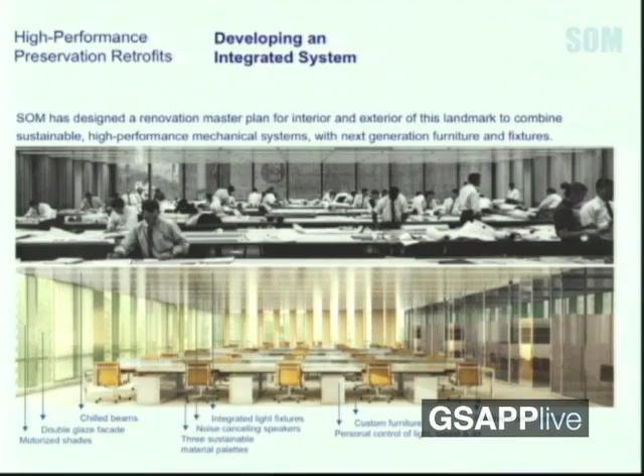There certainly are many manufacturers out there looking at how they can increase the sustainability and thoughtfulness of their own products, but they are really not working at how these all come together. So in many ways, when you're working on a building bringing in these new technologies, you tend to see this developing as the Frankenstein monster of all these pieces being cobbled together, but not really fully integrated.

So as a part of this, we brought together manufacturers, particularly with the use of the ceiling. We brought in ceiling manufacturers Armstrong and Ceilings Plus, lighting engineers from Philips, as well as the chilled beam ceiling systems, and developed a metal membrane ceiling system that would support and conceal all of these issues.

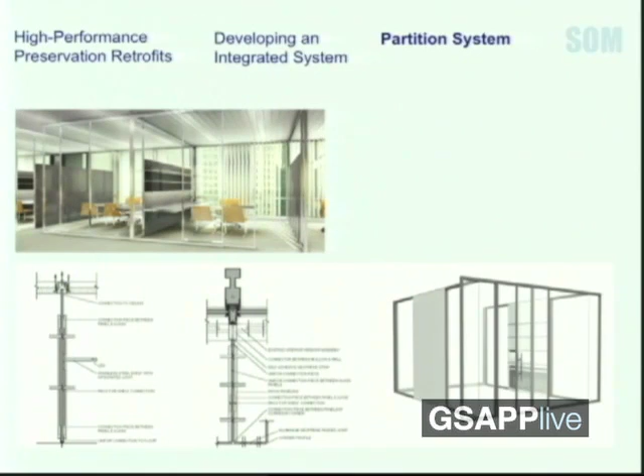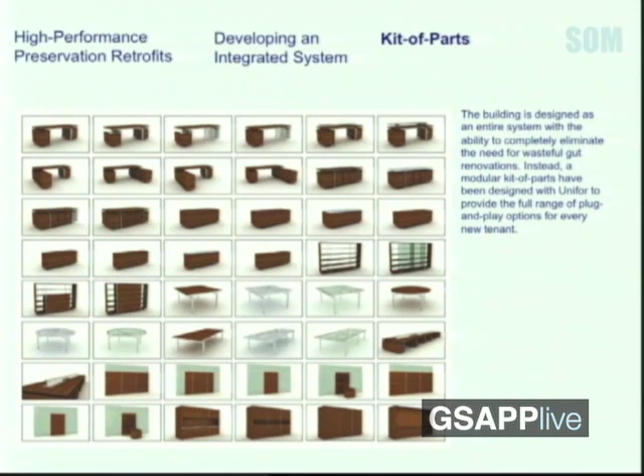Here's some drawings of the ceiling, the membrane modular system we designed that integrated all of these elements well together. We also looked at modular wall systems that could clip into this, working with Unifor in terms of higher performance wall systems, how we can have air integrated and delivered at the desk surface or within the walls themselves, and the development of a furniture system that would clip into this.

In terms of talking about these issues with our clients, we found it's important to come up with an easy, natural way of discussing this—things that are easier to accommodate or accomplish as just practice, things that are lower cost, things that have a payback over a shorter period of time, and then ones that require more time in terms of payback.

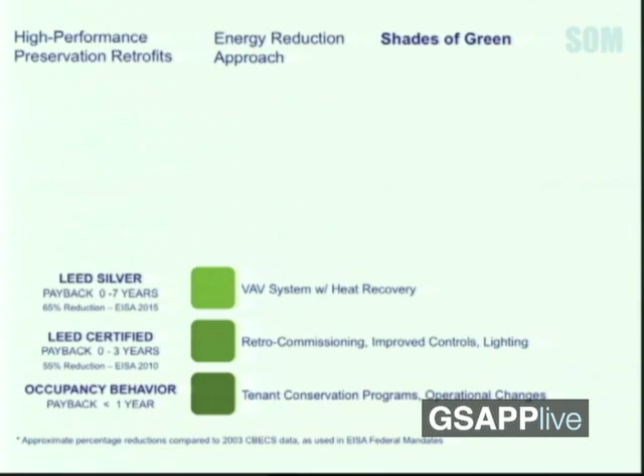So there are levels that we call shades of green, which take into consideration LEED and other measures of sustainability. For this particular project, we looked at all of those.

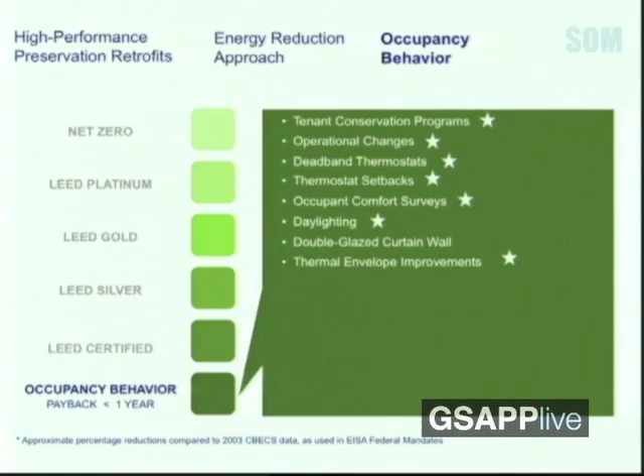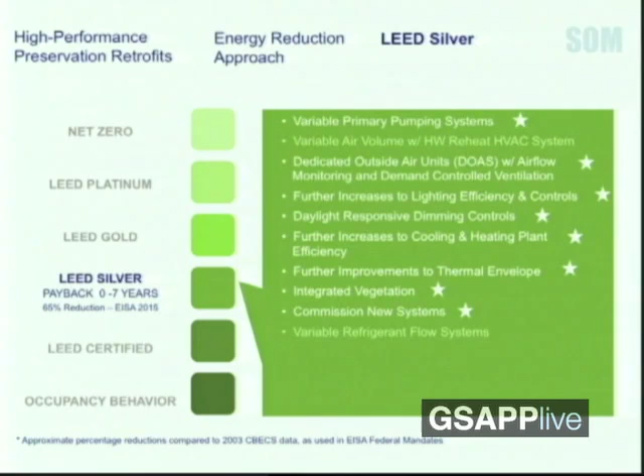The ones here with stars are included in the master plan in terms of behavioral change—those that require a little more thoughtfulness in terms of sensors and so forth. Other measures involve more integrated vegetation within the roof, reclaiming water, and the double wall facade system.

Those measures got us up toward LEED Platinum, and then ultimately we looked a bit further for this building in terms of generating energy that we could do within this building, but we're looking at increasing this in terms of what we can do with future renovations as well.

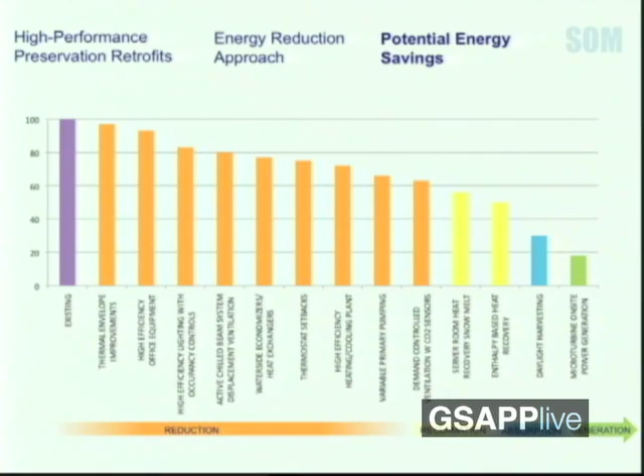What I would also say is we're seeing it's increasingly important to deal with owners of buildings to talk more long term. We find that within institutional clients, the GSA and others, this is an easier thing. We find talking with our clients in Asia or Europe, they also think about building in long-term investments. That certainly is not the case here within the States in terms of building owners or developers.

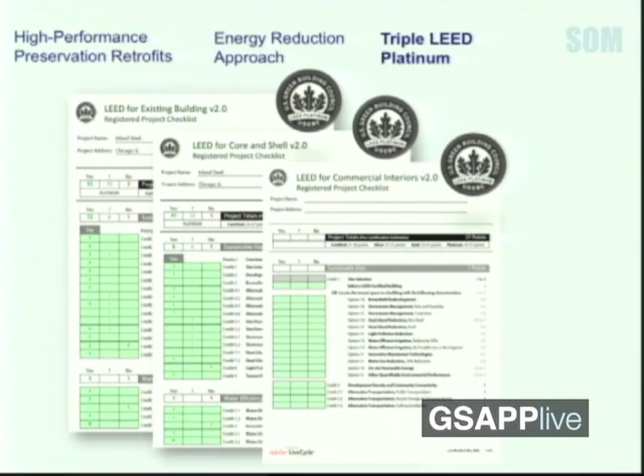The net result of this master plan is we have a triple LEED Platinum. These are our scorecards in terms of the continued measurement of this as this project is then implemented.

The last thing I'd like to talk about is creating a new paradigm. One of the things we certainly see within the marketplace is you rent out new office floors, and the first thing you do is you rip everything out and throw it all away. So we want to see how we can change the idea within the marketplace that you buy into a building, that you find value in that building.

I also think that if there are a lot of clients out there that do want to be thoughtful in these arenas, maybe we as architects and building owners need to give them the tools that they need to actually live this way. This is a little bit easier when you have a building owner who actually is going to occupy their building. I think the challenge here for us is how could we do this for a multi-tenant building where an owner would be leasing this out.

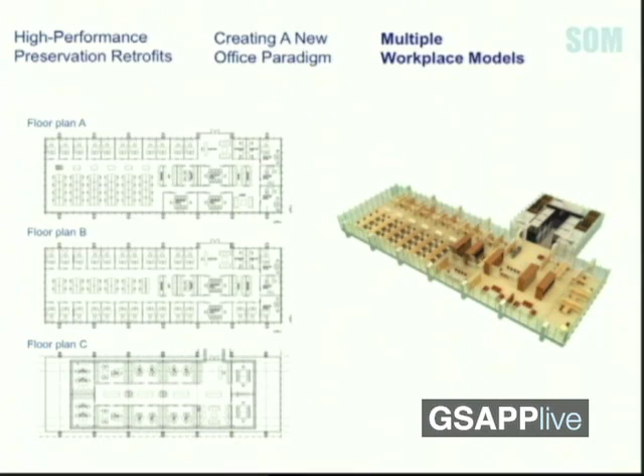So part of it was looking at these systems and how they could accommodate multiple workplace models that could be shown to a client. We also looked at the covering of these systems and how they could be sustainable. In looking at our materials, while we were looking at forested woods and so forth, we did not want to try to replicate an old mahogany kind of world, but we wanted to talk about a new way of looking at sustainability where it was not brown and grungy, but could be joyful and cheerful, coming up with new ideas about living in sustainable, healthy environments.

There was also a degree of service in this building in terms of moving into this office hotel. The idea is that you would move into this product, and there were lots of things that would be provided to you in terms of services, concierge service. We find that this is something that is increasingly marketable in other parts of the world, primarily in the Middle East, India, China, where our clients find it advantageous to move into buildings and not have to start from scratch themselves.

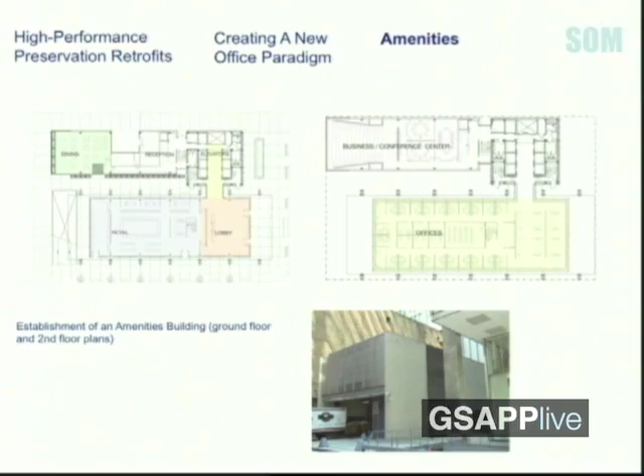So that's my comments then for this morning. Thank you.